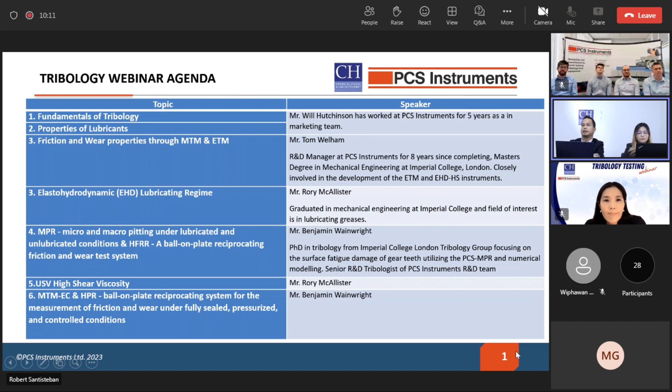Utilizing the PCS MPR in numerical modeling for 8 years. He is also the senior R&D tribologist of PCS Instrument and also in the R&D team. And then for the USV high shear viscosity will be again with Mr. Rory. And for the MTM EC and the HPR rig will be again with Mr. Benjamin Wainwright.

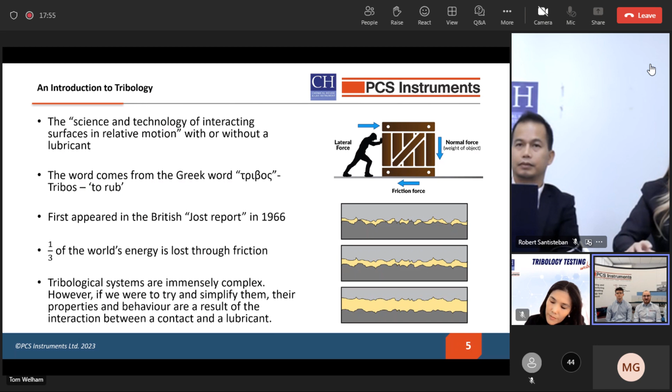Tribological systems are an immensely complex combination of different factors, but if we try to simplify a tribo system down to its most basic thing, their behavior is dictated by the interaction between a contact and a lubricant.

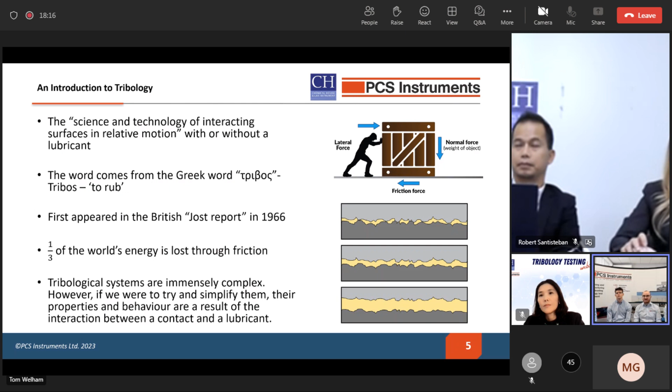So, tribological contacts. There are many important aspects to consider when analysing a tribological contact. First up, we have the materials. In most mechanical systems, the materials involved are steels. However, this isn't always the case, and not all steels are the same. Differences between materials can significantly impact a tribo system, changing the pressures experienced by components, the damage that parts experience, so things like wear and fatigue, how additives in the lubricants affect behavior, and the surface features of the components.

Not all contacts are steel. Different applications require different materials. For example, biocompatibility constraints are put on materials used in replacement body parts, like hip replacements.

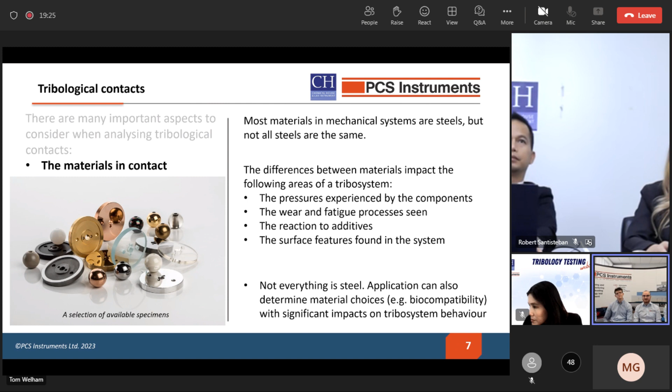Next we have the large-scale geometries of contacts, and whether those are conformal or not. To simplify, conformal contacts, like you can see in the image on the screen, are ones where the surfaces fit into each other. They have large contact areas, meaning they have lower contact pressures. This results in smaller elastic deformations, and some typical places this sort of contact is found is in journal bearings, piston bushes, things like that.

The non-conformal contacts, which you can also see on the screen, are the opposite of conformal ones. They have much smaller contact areas, meaning they have much higher contact pressures. This results in larger elastic deformations at the surface, and some typical places you can find these are in roller bearings, gears, and cams.

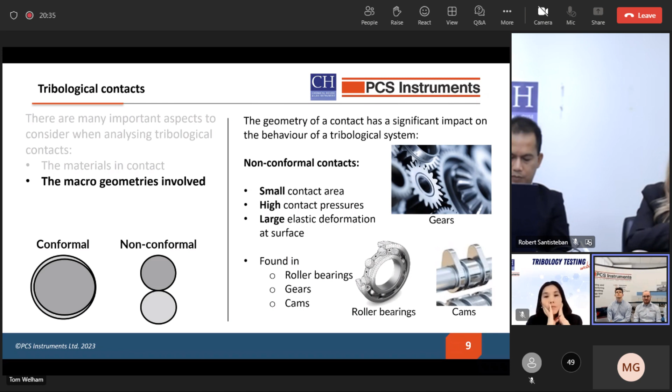Next we have the roughness of the surfaces that are in contact. Even if something feels smooth to the touch, at a microscopic level, the surfaces will still be made of peaks and troughs, like valleys and mountains. This roughness is a critical factor in the type and extent of damage a part will experience when in use. And as you can see from the examples on the screen, different roughnesses are deemed acceptable for different applications, as a balance has to be measured between cost and surface finish.

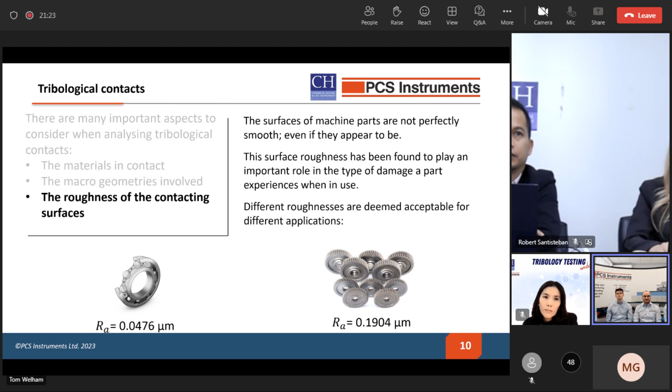Finally, just for this first bit, we have contact pressures. The contact pressures experienced in a tribo system will impact the amount of surface deformation seen on parts. The damage and failure mechanisms found in the system will also affect that. How the lubricants in the system behave, for example, are there additives activated when they're in the contact? The lifetime of the components, that's also very important.

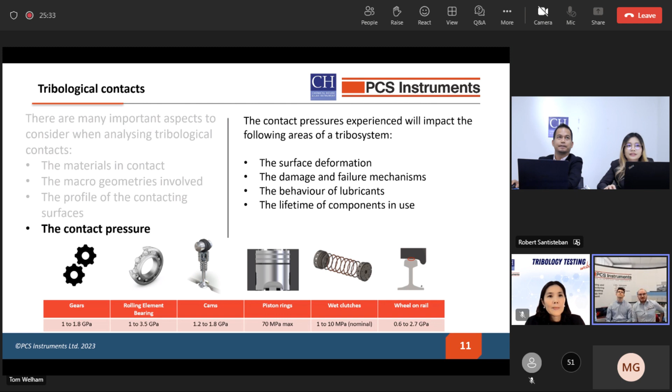So that was all sort of an introduction to tribology and contacts. So now we move on to the other key part of tribology, which is lubricants. When we talk about a lubricant, we mean anything that is within a tribo system which is there to reduce friction and to help parts move more easily.

The formulation of lubricants is very important. It's probably the most important thing. One oil wouldn't work for every application. Different formulations will have very different properties and behave very differently in tribo systems. Some of these properties that will differ are the viscosity of the lubricant, the degree of anti-wear protection it offers, whether it will form a surface film to protect against extreme pressures, and whether it will survive high shear events. Choosing and designing the right lubricant for the job can be the difference between efficient, long-lasting performance and premature failures in your tribo system and soaring costs.

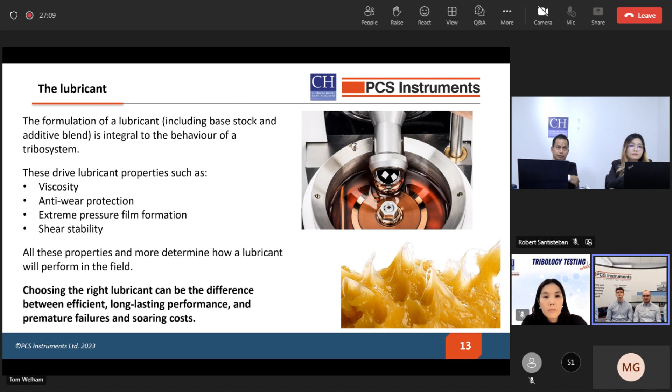We see this all the time across a wide range of applications.

So what does this all mean? Why is it important? These two main factors, the contact and the lubricant, will determine how your tribo system behaves. They will determine what lubrication regime is found. So are you seeing surface-surface interactions or a nicely lubricated contact?

They will impact the amount of friction found. So is your lubricant causing increased friction or is it reducing it and improving efficiency?

They will obviously also drive the thickness of your lubricant film in the contact. So are your surfaces separated, which prevents wear and reduces friction? Is your film too thick and reducing efficiency through churning losses?

And finally, what damage will occur in the system and when? So will your design experience premature failures such as fatigue, wear, pitting or scuffing in the field?

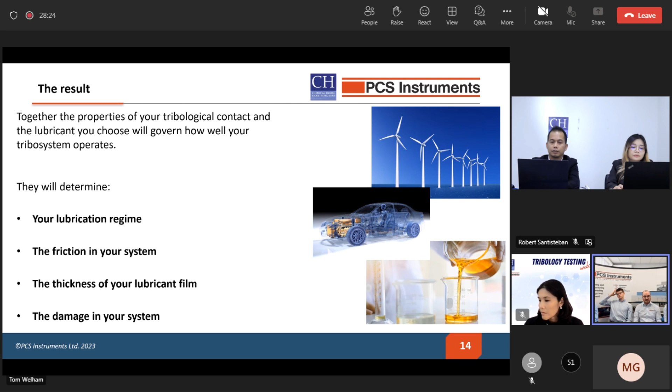If everything works well, if you've got the perfect lubricant for your tribo system, then you're in a great place. That normally means good lubricant films, low contact pressures, low temperatures.

However, in practice, in the real world, you'll very rarely see a perfect system because there are always competing considerations and constraints such as manufacturing costs, which means you can't get exactly what you need. Often you see some issues, things like surface-to-surface contact resulting in wear, or high stresses and pressures resulting in fatigue, or high temperatures resulting in scuffing.

This is where lab-based tribological studies come in, and our machines come in. They let you evaluate exactly how your system will perform in the field, and from this you can optimize your design, the design of both your machines and your lubricants.

Quickly, cheaply, reliably, all without having to resort to costly full system, large scale tests. You can also precisely balance those competing considerations to find the best solution for you.

So to summarize this intro portion of the presentation, tribology is critical in making sure moving surfaces do so in the most efficient and effective way possible. It allows you to understand the conditions the parts in your machine will experience when in use, evaluate how well they will work and how long they will last.

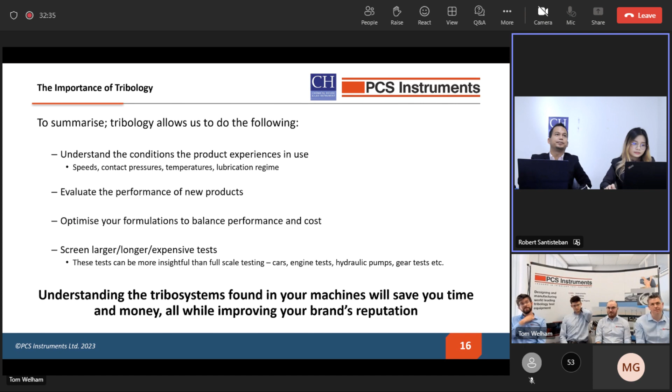Final page just for me before I hand off to my colleague Tom. So where do PCS Instruments come into the equation? We manufacture a wide range of laboratory test equipment to perform those benchtop tests I was just talking about.

All of our machines enable users to perform quick, easy to run, repeatable, reliable and accurate tests. They're also designed for versatility. So whether you want to run a standard test over and over to qualify an oil or do cutting edge bespoke tests designed with very specific applications in mind, our machines can meet your needs.

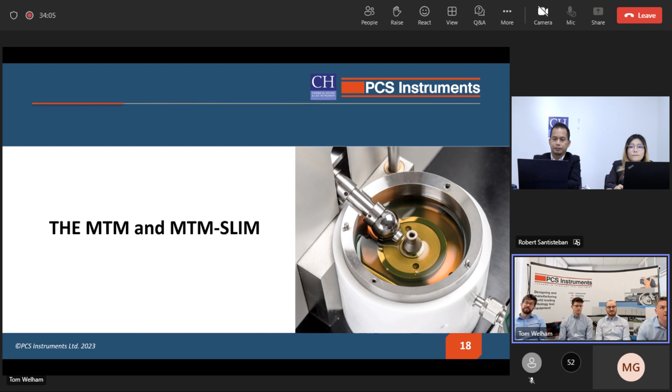Thank you. So I'm going to first talk about a general purpose tribometer, desktop tribometer called the MTM, and also the MTM Slim. So the MTM is a very flexible benchtop tribometer. It has a ball-on-disc geometry. So it's designed for looking at measuring frictional properties in a wide range of tribological contacts.

Many applications have been studied using the MTM, and we have a wide range of accessories to broaden its use even further. For example, we have the option of soft specimens and a lower load option to allow us to look at biotribological contacts.

And the MTM Slim option, which is an optical system that allows us to measure tribofilm growth. As well as things like a grease scoop and a grease applicator, which allows us to make repeatable measurements of grease performance.

We've got a huge number of materials and finishes of specimens, as well as different operating modes that we can measure friction under. And so I'll run through some of these accessories and some of the operating modes of the system now.

Firstly, the capabilities of the rig. As I said, it's a ball on disc geometry, and one of the key features is that both of these are independently driven. So we can control the speed of the ball and the speed of the disc independently. This allows us to set the amount of sliding and rolling in the contact, which gives us huge versatility in the conditions we can produce and the contacts we can look at.

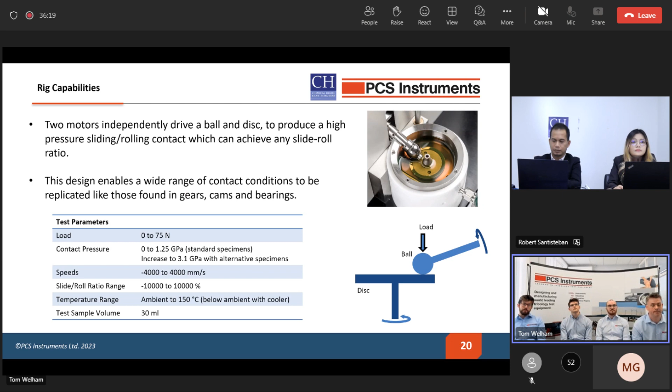So just some points about the relevance of the MTM to industry. It's used across lubricant and lubricant additive manufacturers to develop lubricants, and as we said, it's primarily used to measure the ability of a lubricant to control or reduce friction.

Also, as a screener test, it's small scale, and the cheap specimens compared to full scale testing mean it can be used as a very good screener for more expensive full scale testing. And it's been shown that the MTM can correlate to these much more expensive tests.

The SLIM system allows us to look at tribofilm formation and the growth of tribofilms, which helps with the discovery of new additives and the design of new formulations.

Also in standard testing, it's so easy to use. It's an automated system, so it's used widely to test every formulation, giving a quick and simple comparison of the frictional properties. So the testing can take the form of different step types.

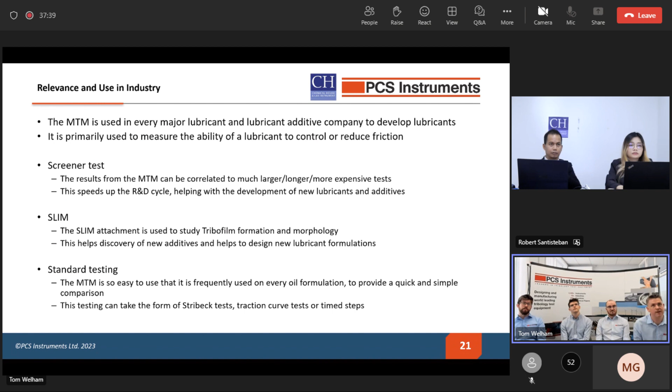We have Stribeck, traction tests, and time steps. I'll go through these individually to explain how each one works.

A Stribeck step is where we look at how entrainment speed affects traction or friction for a fixed slide roll ratio. So we change the speed and keep the slide roll ratio constant.

A traction step is where we fix the entrainment speed and then see how the slide roll ratio affects traction. Finally, a time step is where we look at the evolution of the traction coefficient over time, while we either ramp or keep the speed and slide roll ratio constant.

In more detail about the Stribeck curves — they're really useful because by varying the entrainment speed, we can look at how the lubricant behaves in different lubrication regimes. So at high speed, around here, we're in the full EHD region, where the oil itself is supporting the contact. There's no metal to metal contact, so it's the base oil properties that control the amount of friction in the contact.

As we move down through the speed range, we come into the mixed regime, where we're starting to have some interaction between asperities in the contact. Right down at very low speeds, we're getting towards the boundary regime, where there's significant asperity contact, and the load is being supported a lot by actual metal to metal contact. When we can test down in this region, we can look at how tribofilms form to protect the surfaces in these regimes.

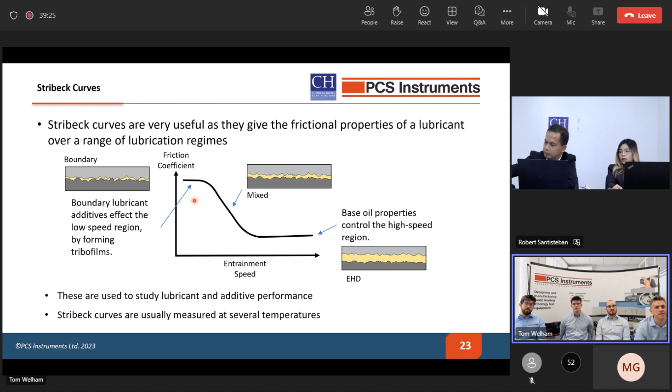So traction curves are also very useful. We usually use the term traction to describe the use of frictional forces to transmit mechanical energy. As mentioned, in this type of step we fix the entrainment speed and then vary the proportion of sliding to see how traction is impacted.

There are many benefits to looking at this, one of which is to look at the limiting shear stress of the lubricant. It's particularly useful in CVTs as well, where we're using the lubricant with the aim of transferring a mechanical force using the contact.

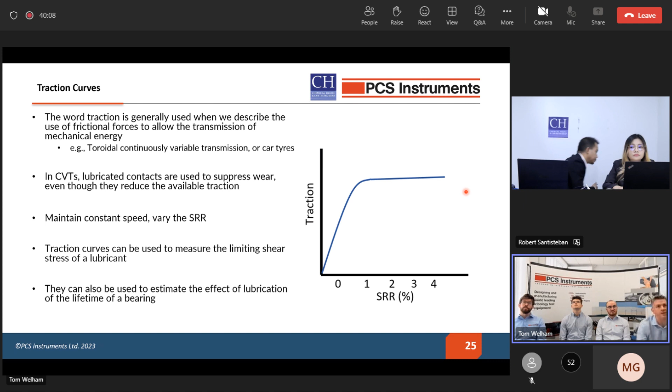So finally, the time step. This allows us to vary the speed and slide roll ratio over a fixed period of time. It can be used independently, but often it's used in conjunction with other steps to allow for the development of tribo films and running in of surfaces.

We might want to impose a consistent level of sliding when comparing multiple lubricants, for example at an elevated temperature. When we run our tests, and this is common to all our instruments, we have a profile editor that allows us to customize each step the machine will run, the durations, the conditions, which gives amazing flexibility to the range of tests the machine can run.

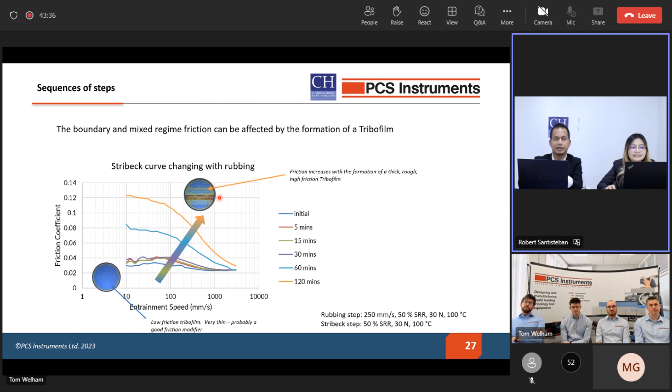We're going to look now at a few applications of the MTM, not just in the standard steps, but some of the alternate accessories that can be used with the instrument.

Firstly, an interesting application is to test seal material. Seal testing is traditionally split into two categories: simple wear testing, such as using a pin on disc, or testing the complete seal in place. The first method, a pin on disc, often bears very little relevance to the actual final application. The second is generally a very expensive test and is actually quite unsuitable for developing new materials.

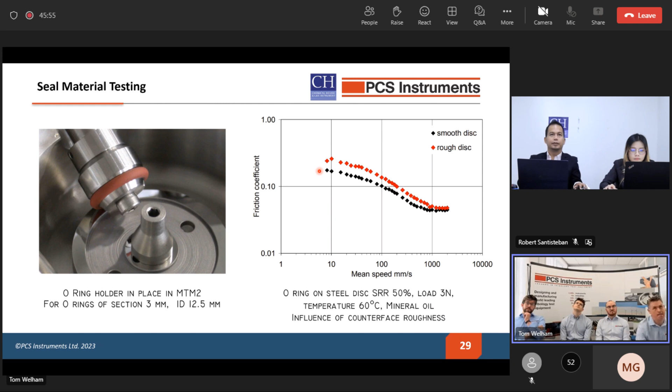Biotribology is another interesting application for the MTM. It's an expanding field of research. The MTM has an excellent track record of giving very useful, repeatable friction measurements in soft contacts, a bit like we've just shown.

We can use a variety of materials for biotribological studies, but the use of PDMS for either one or both of the surfaces is very common in the literature. So we can adapt the MTM using the low load beam, bringing us to a load range of 2 to 8 newtons, and use it to look at artificial joints, mouthfeel, cosmetics, amongst many other biological contacts you can think of.

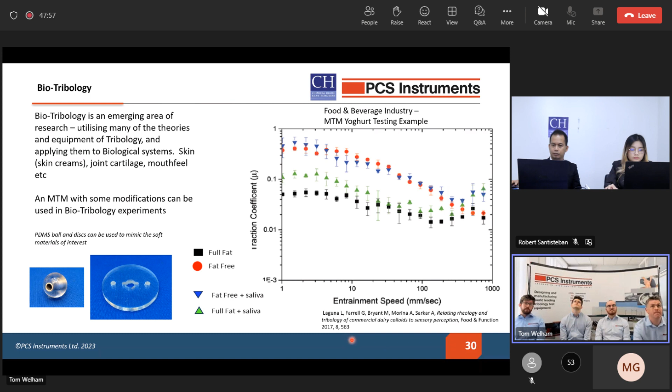One final application, away from biotribology now, is some work that was done on wheel-rail friction using the MTM and the grease scoop and applicator accessories. In the rail industry, top of rail products and flange products are used to control the friction between the rail and the wheel.

With the top of rail product, we're looking at reducing the amount of friction over just the dry contact, but we don't want to just use a grease. We want significantly more friction than that to allow us to accelerate and keep on the track nicely. So the MTM was used as a study in this.

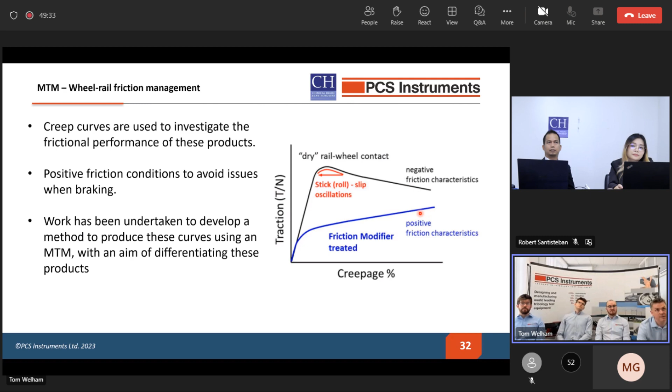So the use of friction modifiers in these top of rail products allows us to have what we call positive friction characteristics. As sliding increases, the traction coefficient increases, giving this behaviour which means we never get into this unstable oscillation.

There was a study into this using the MTM, and it was found to very well be able to differentiate between these different top-of-rail products. It ended up being cited in EN 15427 as an indicative test. So now there are qualifications on the level of traction we see in the MTM to allow these products to be used.

I think I'm pausing here.

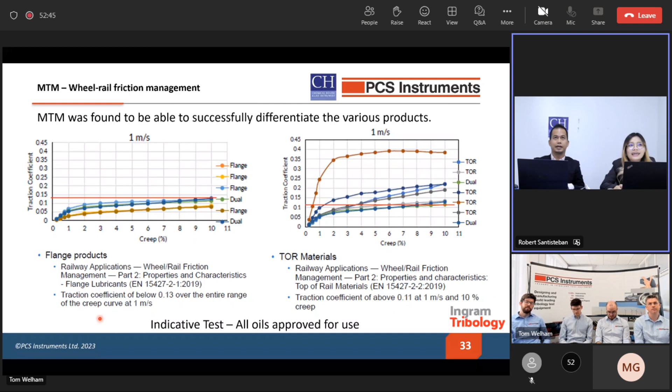Thank you. So now I'm going to talk about one of the MTM's most widely used accessories, the SLIM system, also known as the 3D Mapper. It's an optical interferometer which allows the thickness of tribofilms to be measured while the specimen is mounted inside the MTM. It has many uses, and I'll explain a few of these now.

The system works by bouncing a white light off a semi-reflective disc. Part of the light is reflected directly back, and part of it goes through the contact, reflects off the steel ball, and when the light recombines, we have constructive interference at different frequencies depending on the thickness of the anti-wear film formed on the surface.

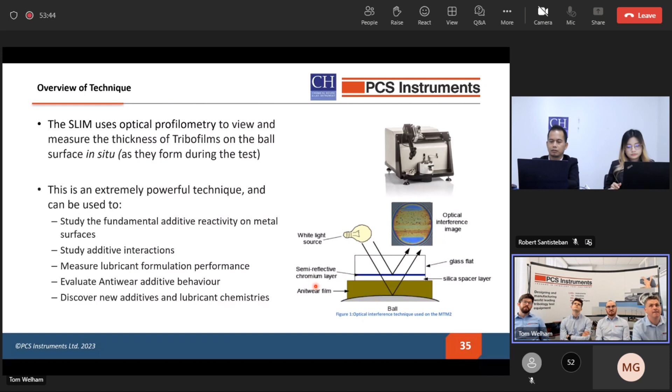So the way it works in the MTM, when running a test, the ball is rubbed against the metal disc, using a time step that allows us to build up the tribofilm. Then we backload the ball against the glass window that sits above the lid of the MTM, with the ball stationary. We then take a picture using an attached camera, and that allows us to translate the image into a measure of film thickness, or tribofilm thickness.

So this is a typical use case showing how tribofilms evolve in different oils. We took a series of timed steps represented by sliding distance. We set a speed and duration, and from that we could work out the distance we wanted. This compares 4 different oils, and on the y-axis we have film thickness in nanometers.

It shows how varied tribofilm formation can be between different chemistries. We have some fluids that form very little or no film, and then we can see how some take slightly longer to start building up film thickness, and others that form earlier and are actually slightly unstable, so there's a bit that's worn away as the test progresses.

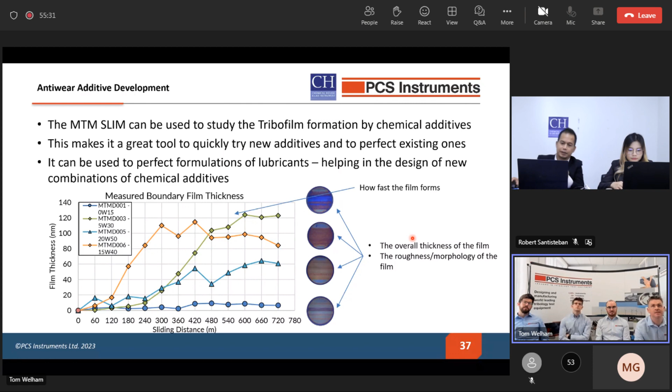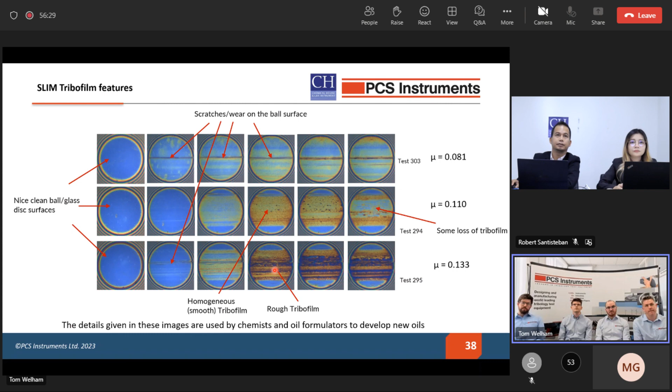So just finally, about the MTM - why is it so useful? I hope I've demonstrated that the Slim can be very useful in developing new anti-wear and other boundary film additives, as well as being useful in perfecting formulations that develop a stable tribofilm, helping to control friction and wear.

With the Slim, the MTM can also be used as a screener for new additives and formulations, which can save significant costs compared to large-scale testing. And finally, with increasing restrictions on traditional anti-wear additives such as ZDDP, the MTM SLIM is a great tool to look at and compare entirely new additive technologies.

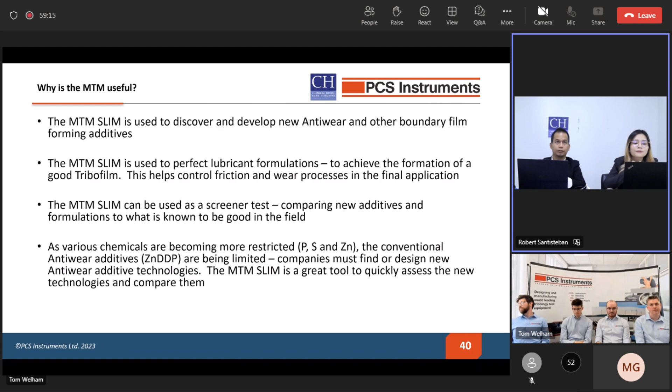So next, closely related to the MTM is another instrument called the ETM. The ETM is very similar in terms of geometry, ball on disc, specimens of the same size. The main difference is that we can now go up to loads of 1650 newtons.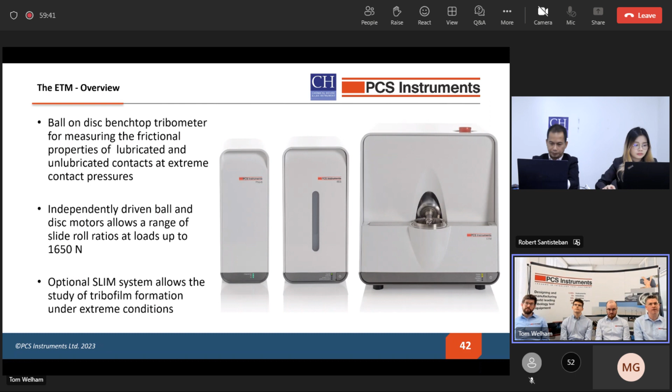It also has the slim option to look at tribofilm growth, but now under more extreme contact pressures. Here are some specifications for the ETM, comparing the contact pressures we're able to achieve - up to 3.5 gigapascals with the same geometry specimens as the MTM. This shows the contact pressure range we're able to test under. Otherwise, the spec is very similar.

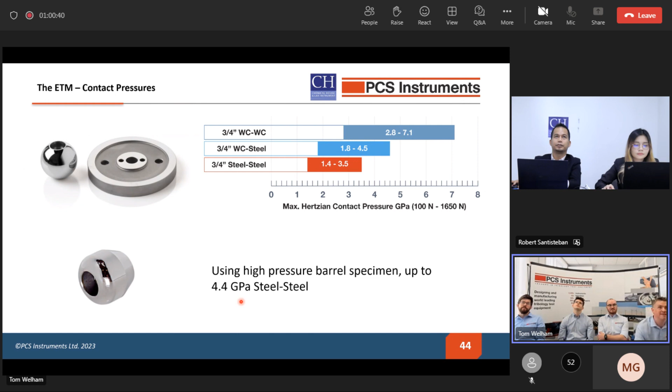A little bit more about contact pressures with the standard specimens - as I say, up to 3.5 gigapascals. But we can actually use tungsten carbide specimens if we want to go even higher - contact pressures as much as 7.1 gigapascals, extremely high. Or if we want to stick with steel, we can change the geometry of the ball to give a sharper radius, which increases contact pressure, taking us up to 4.4 gigapascals, still with a steel contact.

The high contact pressures possible on the ETM allow us to mimic the conditions seen in very highly loaded gears and bearings, which helps with the development of new lubricants, coatings, and materials.

I'm going to mention a few applications today, such as the ability to generate high load traction curves to investigate mechano-tribofilm formation, and also to evaluate the scuffing resistance of lubricants under these very high contact pressures.

Traction curves are made in the same way on the ETM as the MTM. The graphs here on the left show 4 traction curves at different contact pressures from 1 to 4 gigapascals. This is from a paper published here in Tribology Letters.

We can see the initial slope of the curves increases significantly as we increase contact pressure, and we also arrive at a much higher traction coefficient at significantly lower slide roll ratios, as we'd expect.

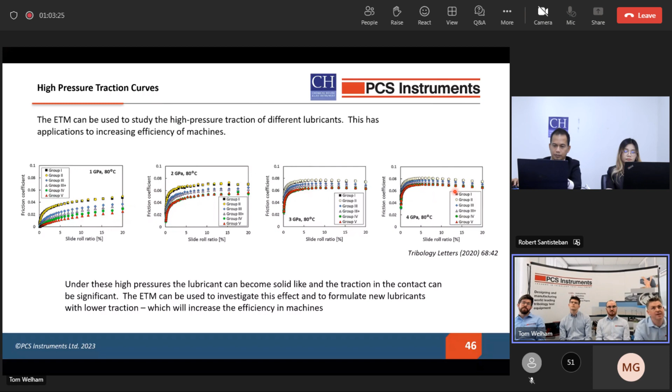From a mechanochemistry side, this was a paper published in 2020. Very quickly, it shows how previously it was thought that the development of ZDDP films required metal-to-metal contact, but actually using the ETM in this paper it was shown that rather than being hydrostatic pressure that's responsible for tribofilm growth, it's actually shear stress dependent. So we can have a full film, but if the shear stress is high enough, we can still develop ZDDP films.

We see this shown here: these top 2 have much higher friction coefficients, and using the ETM SLIM we see the development of tribofilms, whereas here, where the friction is significantly lower, under otherwise identical conditions, we see much less of a tribofilm.

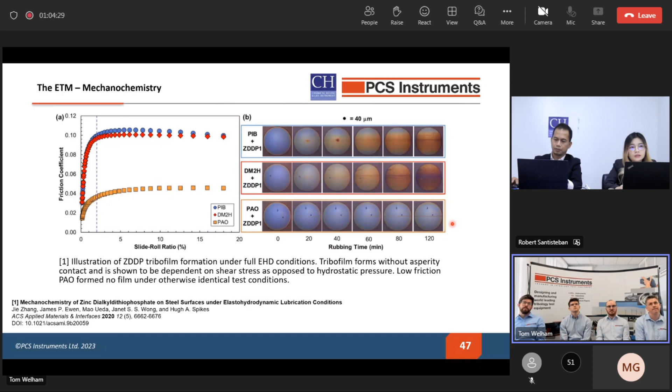So again, why is the ETM useful? It's used to study the effects of high contact pressures on the performance of lubricants, which are relevant to some advanced gear and bearing applications. We have seen that chemical additives can behave very differently in the contact, which is not yet fully understood, so the ETM can be used to help study these.

And as a screener for example, the FZG scuffing test - with ETM specimens the test is much quicker, the specimens are much cheaper, and so it's a great way to screen lubricants for that test. As it says here, it's a unique instrument with no alternative. So I'm going to hand back to the translation.

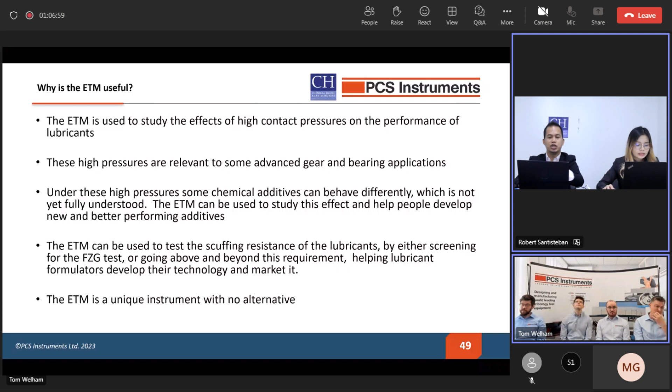Okay, thank you for that. So I think we will be moving to the new topic, which is the elasto-hydrodynamic lubricating regime. So moving from traction or friction measurement by the MTM, let's continue the presentation to the topic to measure the thin film that is formed during the EHD.

So using this EHD rig, may I call now Mr. Rory to proceed with this presentation. Yeah, thank you, Robert. Yes, that's right. I'll be talking about the EHD rig, which is PCS's instrument for measuring the thickness of lubricant films.

This machine allows accurate measurement of film thickness under conditions close to those of real machinery. It's applicable to base oils, new lubricant formulations, as well as polymer additives like viscosity modifiers. It's also commonly used in research, analyzing the fundamental aspects of EHD lubrication.

So what it's actually doing is, as shown in this diagram here, we're using a microscope to look through a glass disc at the contact between the steel ball and the glass disc as they roll together.

Now running through the capabilities of the EHD rig quickly. It can measure lubricant films up to 1,000 nanometers or 1 micron, and that can be under contact pressures ranging from roughly 0.2 to 2 gigapascals, depending on the contact conditions, at entrainment speeds of up to 4 meters per second.

And like the MTM, an advantage of this machine is that the sample volume required is actually quite small. In this case, 120 milliliters.

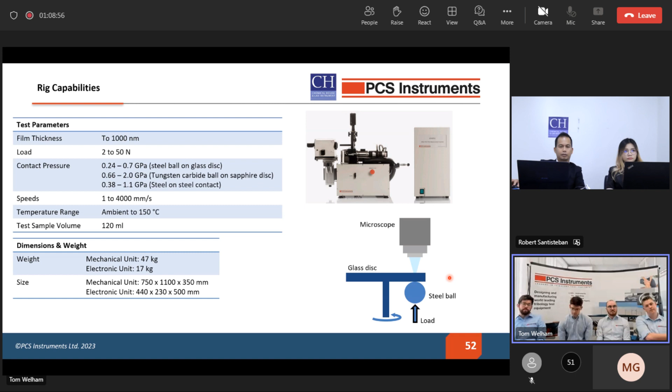So there are 3 fundamental techniques that the machine is capable of performing. There's film thickness measurement, which is fundamentally very similar to the process that Tom described earlier, except in this case we're taking a very accurate measurement, accurate to theoretically 1 nanometer or so, across the center of the contact.

It's also capable of contact mapping with the SLIM method, which is exactly like what Tom described. The difference here is that we're looking at the rolling contact, and we're measuring the actual thickness of the lubricant film separating the surfaces.

It can also separately perform traction testing, and the advantage here is that you can measure film thickness and then traction under very, very similar test conditions.

So the rig mimics the contact conditions of applications like bearings and gears, allowing evaluation of oil formulations and important mechanisms like lubricant starvation. And that gives very useful information to lubricant engineers relating to real applications.

And actually, film thickness is specified in some lubricant specifications. For example, the Dexron 6 specification by General Motors for automatic transmission fluids actually specifies the minimum film thickness allowable under certain conditions.

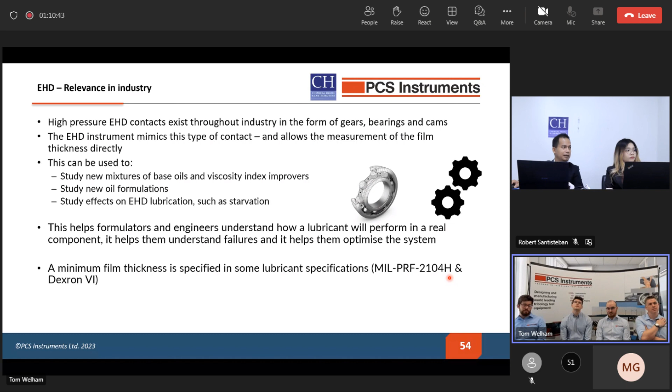So two applications that I'll mention here are bearings, in which the contact conditions like speed, temperature, and other conditions can be replicated, and so a film thickness estimate can be achieved using the EHD. That would indicate whether the lubricant viscosity is sufficient for your bearing application.

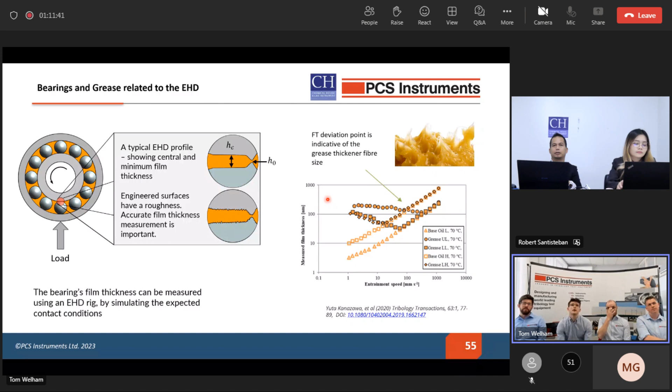An important ability of the EHD rig is to evaluate the pressure viscosity coefficient of a lubricant. So viscosity increases exponentially with pressure. In this case, for an oil at 20 degrees Celsius, the viscosity increases more than 1 million times when going from atmospheric pressure to approximately the pressures of a tribological contact.

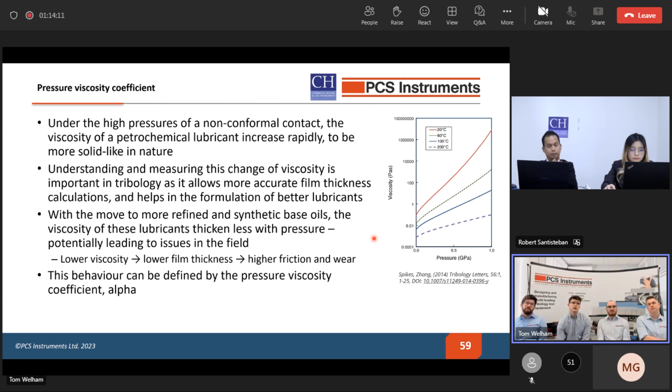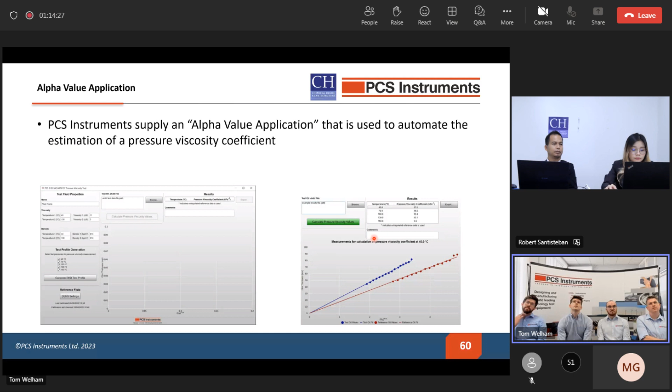Using PCS's alpha value application, the film thickness results from a test can be fitted to a model for film thickness, providing a simple method to obtain a lubricant's pressure viscosity coefficient.

So to summarize the EHD rig's capabilities, it can measure the film thickness of lubricants under EHD conditions, either with the extremely accurate interferometry technique or the SLIM contact mapping.

That can allow optimization of lubricant viscosity, allowing maximum efficiency while still protecting surfaces from wear. The EHD is commonly used to evaluate film thickness behavior of new lubricant formulations, base oil mixtures, and viscosity modifiers, as well as being able to evaluate the pressure viscosity coefficient of lubricants.

It's also used in research, analyzing the fundamental mechanisms of EHD lubrication. And I think at this point, I'll pause for translation.

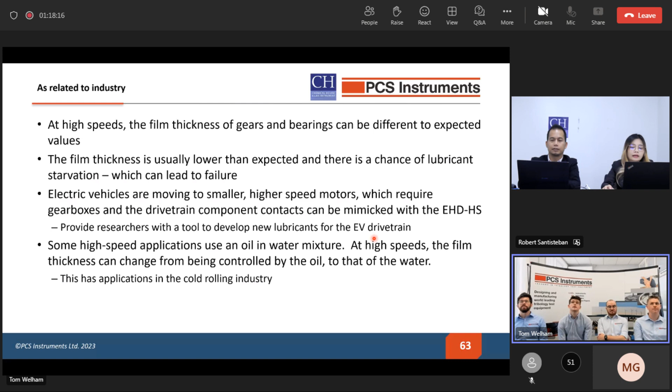Another example where high-speed behavior is different to lower speeds is that of emulsion lubrications. This is another example where the high-speed EHD can help you understand more about that application. In that specific case, the effective viscosity of emulsions can greatly reduce under high speed conditions, close to that of water.

It was shown in this work that this behavior was caused by a combination of inlet shear heating, which reduces viscosity, and inlet starvation, which I showed earlier can greatly reduce film thickness. It's difficult to predict these effects without actually measuring them.

The EHD HS is very useful for directly measuring how these effects occur. The researchers found that shear heating effects varied significantly depending on the type of base oil, and therefore different correction factors were required for the different oils, which had to be based on experimental results.

So it's difficult to model this type of behavior, but the EHD-HS allows measurement and assessment of the behavior of different oils under these effects.

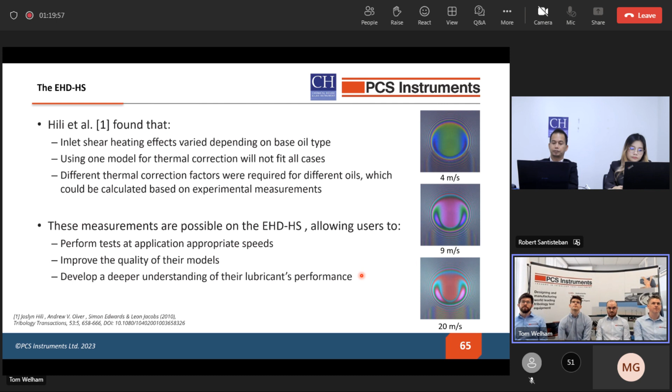Much like the standard EHD, the EHD-HS can deliver a wide range of contact conditions in terms of temperature and contact pressure. But while the standard EHD can go up to a maximum entrainment speed of 4 meters per second, the EHD-HS can reach 20 meters per second.

That makes it applicable to applications such as electric vehicle drivetrains, additive formulation in automotive lubricants, metalworking fluids and emulsions, high-speed turbine oils, as well as greases, which are particularly vulnerable to inlet starvation.

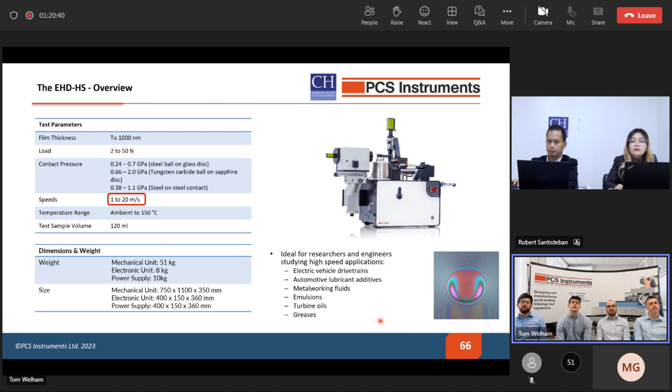So to summarize this quick introduction to the EHD-HS, this machine is the high-speed upgrade to the standard EHD and is similar in capabilities except that it can reach up to 20 meters per second rolling speed. This makes it suitable for the film thickness measurement of lubricants for high-speed applications like electric vehicles, which are trending to smaller and faster conditions, as well as a range of other options.

In addition to the ones I've already mentioned, things like motorsport, elevators in tall buildings which travel extremely fast, machine tool spindles, and aviation gearboxes. Finally, it's useful in the research of fundamental effects like inlet starvation and shear heating, which can have significant impact at high speed.

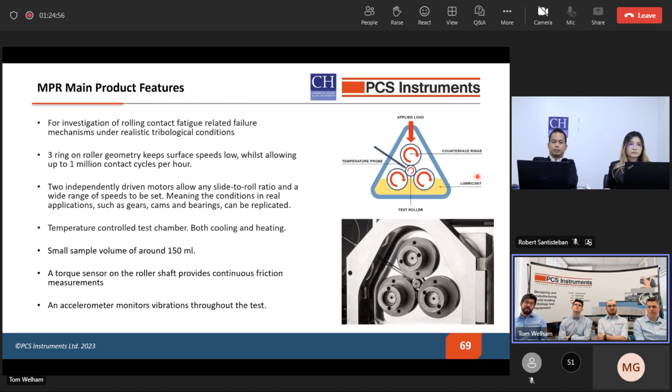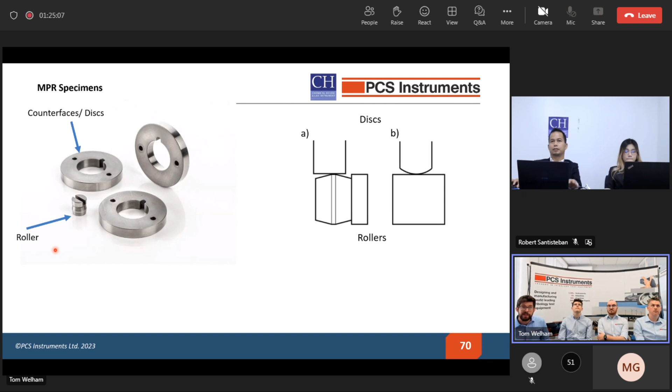So I'll talk a little about the specimens that we use on the MPR. As I said earlier, we have 3 counterface discs, and these run against the central roller, and the central roller is what generates the damage. The roller can come in multiple geometries. So we can have a chamfered roller, which gives us a line contact. In a chamfered roller setup, we have a flat disc. This is applicable for gearing, where we predominantly see line contacts, and it's very good for generating micro-pitting damage or wear, because as the roller profile is reduced due to material loss, the pressure does not reduce as significantly.

However, other contacts are used as well. So we also have crown discs, where we have a radius on the disc surface, and this gives us an elliptical contact when run against a flat roller. This is more applicable for bearing contacts, and we can generate much higher pressures. We can actually vary the crown radius to extremely small radii to generate high pressures such as 4 to 4.4 gigapascals, whereas the line contact will probably end up generating more like 2.5 to 3.

So I'll talk a little bit about what is fatigue and why it's important in tribology systems and why we need to test for it. Fatigue is damage that accumulates due to cyclic loading. This is often at much lower stress levels than the material's ultimate or even yield strength, and it's measured in number of cycles. This is, in time to failure, often measured in millions of contact cycles. A contact cycle is a single event, for example, 1 rotation of a gear tooth or 1 rolling element across a raceway of a bearing.

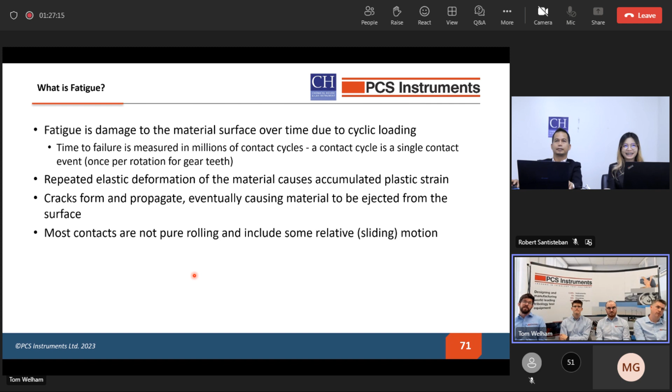So there are quite a few types of fatigue. In particular, I'm going to focus on rolling contact fatigue, which is what the MPR tests. This is obviously most commonly observed in rolling contacts such as element bearings, gears, and cams, and they're all non-conformal in nature, so they are generated under high contact pressures.

Rolling contact fatigue is made especially difficult to study because it has a large number of influencing factors, such as material geometry, the geometry of the contacting bodies, pressure, the lubricant, the roughness, and of course sliding in the contact as well, which applies a shear force that pulls the surfaces apart and creates the cracks and pits that we see in bearings and gears.

The two main types of pitting and fatigue damage we see in these contacts are macro pitting and micro pitting. Macro pitting occurs on quite a large scale, so we can see with our naked eye these large pits that form on the surface, and these are often detrimental to the application, often calling for the end of life of these components to be replaced.

Micropitting, on the other hand, happens on a much smaller scale, often on the same scale as the asperities - the peaks of the surface roughness that are in contact, measured in about tens of microns. These can form a dense network of pits and cracks and create a continuous removal of material, and the micropitted surface can end up looking quite dull and matte in appearance.

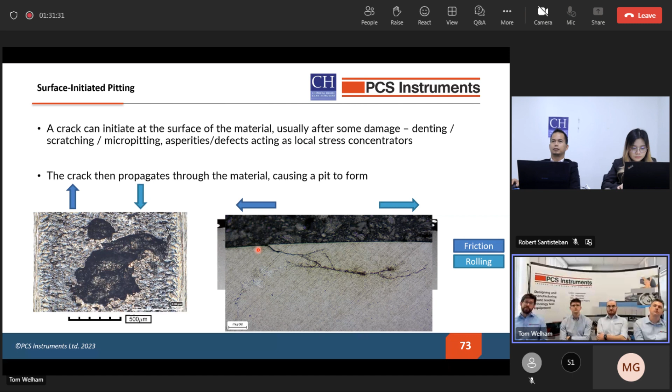Here's some examples of surface-initiated pitting. We often see a distinctive shape, this fan shape. The point of the fan, located here, often indicates the origin of the crack, and you'll see beach marks close to the origin where we have these striations from stop-start propagation, and then towards the end of the pit it'll be a torn surface where it propagated very quickly and the material was removed.

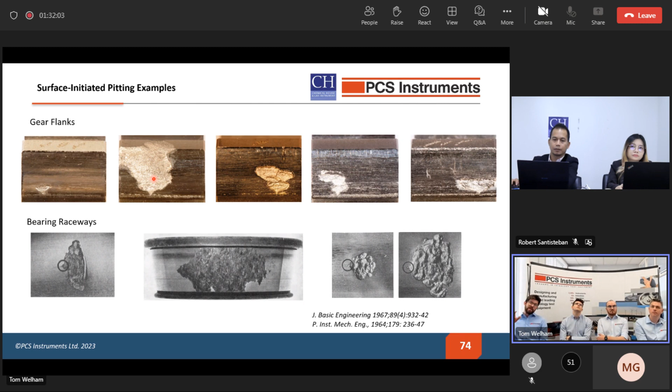So in an MPR, we can run a lot of these pitting tests, and the MPR is very good at running pitting tests because you can generate a lot of cycles in a short period of time. Because of the accelerometer addition on the MPR, we can monitor vibrations throughout the test.

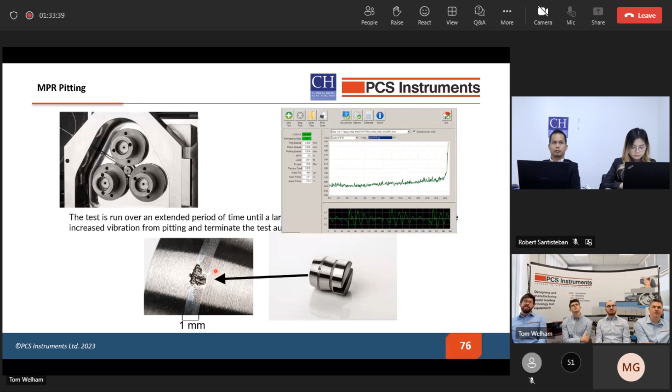And when the test is over, we can form this pit, take it out and analyze it. We can cut the specimen up, take pictures, and analyze the profile of the roller after the test. Here's an example of an accelerometer trace throughout the test.

You can see that for much of the test, the vibrations are really low, because what we're seeing is just a crack slowly propagating. But as soon as that pit is formed, you get a very large spike of vibration. What's fantastic about the MPR is you can stop the test as soon as that pit occurs, so no more damage is accumulated after that, which makes it much simpler to analyze the pits formed from your pitting test.

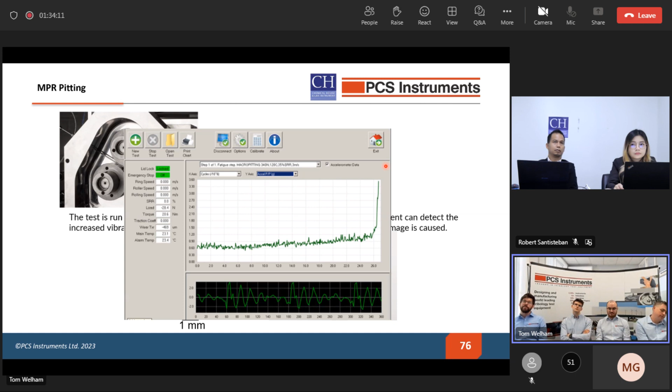Next, we'll talk about micropitting. Micropitting is more of a concern in rougher contacts and thinner films, where you have a lot of roughness in contact, which creates very high stresses very close to the surface. It occurs in these non-conformal rolling sliding contacts, quite often in gears which have a rougher surface than bearings.

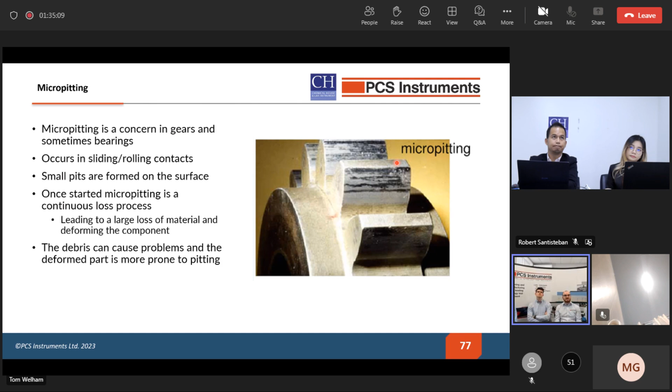This can be akin to something like wear, but micropitting is a fatigue-driven process, unlike wear. The debris can cause problems as well, as it can get inside the contact and actually accelerate the damage as the micropitting is formed.

So the mechanism behind micropitting: it's surface fatigue. It happens very close to the surface, and it's fatigue on the asperity level, caused by the surface roughness. This is most common in the boundary or mixed lubrication regime.

The surface roughness in contact forms very high stresses very close to the surface, and the cracks propagate in the opposite direction to friction. Many cracks are formed, and these cracks interact with each other in a very complicated way, which is very hard to model. Small bits of material are ejected continuously as the process goes.

So we end up with a lot of material loss due to micropitting. Here is a surface generated on an MPR specimen, with many cracks and pits being formed continuously. You basically regenerate the surface over and over again, and if you can maintain the same test conditions as the MPR can do, you can generate a lot of damage very quickly.

Here we have a few more examples of MPR testing. Another great thing about the MPR is you can stop the test, pause it, and take the roller specimen out. You can measure the level of micropitting by looking at the profile, measuring the track width, and see how the profile width increases throughout the test, giving a measure of the level of micropitting throughout the test.

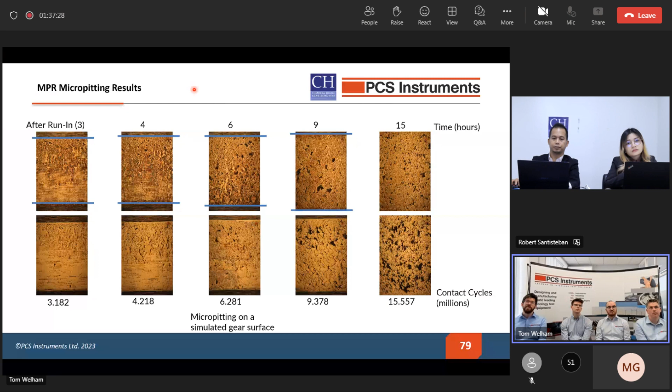So why is the MPR useful? What industry are we interested in looking at fatigue? Well, to be honest, all industries should be very interested in looking at fatigue and wear testing. Heavy industry in particular, and transport, the energy, metallurgy. For example, in metallurgy we're very interested in the crystal structure of steels and how that is fatigue resistant. There's a lot of parameters to change there, and if you're testing steels, you want to test them quickly to get a lot of feedback.

The energy sector, so wind turbines, they're seeing a lot of fatigue failures at the moment, premature failures. It's very important that they test their machine element components. The same for transport. Lubrication, so oil formulations, we want to look at how their formulations protect against fatigue and wear. It's crucial that they do fatigue testing on those too. So the MPR is all about improving the safety of machines and increasing the reliability, and therefore the cost, of machine element replacement.

In summary, the MPR is an accelerated rolling contact fatigue tester. It can reduce the time it takes for pitting and micropitting tests compared to other standard tests out there. It can be used for a wide variety of applications to develop new materials, looking at coatings and lubricants. It can mimic the parameters found in gearboxes and bearings, machine elements for a wide range of applications. And because of its three contact geometry, we can look at the real design lives for these applications in a very manageable, short space of time.

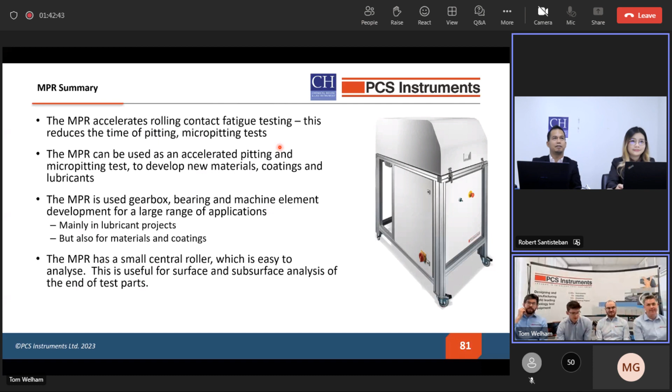So the HFRR, like Robert said, most of you will probably be very familiar with this instrument. This is one of the first instruments developed by PCS. It's the high-frequency reciprocating rig, and it consists of a ball specimen, which is the upper specimen, and a disc. This ball is loaded against the disc and vibrated at a high frequency back and forth in a lubricant bath, and this simulates the performance of both fuels and lubricants under boundary conditions.

The pot which holds the disc is heated and the temperature is monitored at all times, and we get a continuous friction measurement throughout the test.

Here are some of the parameters of the HFRR. We can test up to loads of 10 newtons, which gives us a contact pressure of maybe 1.4 gigapascals. The frequencies are about 10 to 200 hertz, and stroke lengths of 20 microns to 2 millimeters. With the addition of the high-powered heater option, we can go up to 400 degrees.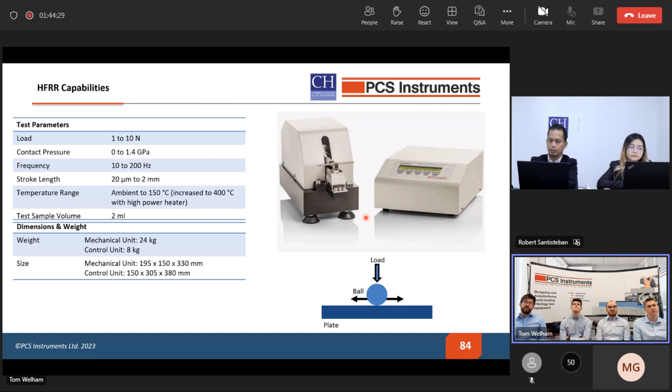A benefit of the HFRR is the very small amount of lubricant volume required. So it's a really good screening test for niche applications where you're not creating a huge volume of lubricant at once. And it's the only instrument specified on the diesel fuel lubricity test methods, that's ISO 12156 or ASTM D6079. When you have an HFR, these standards are preloaded onto it, so it's very easy to test with them. But it's not just on the standards, it could be used for lots of applications too.

The HFR is a really good screening test for lubricants because we can look at the measure of friction and wear very, very quickly, and it's very easy to compare the performance of lubricants because of this.

An example of the kind of application which the HFR is very good at looking at is piston friction in lubricant development, so sliding up and down of pistons. It can evaluate the coatings, materials, the lubricant formulation. There's a lot of parameters that can be changed for an HFR test. It can also look into failure modes such as fretting or false brinelling, which is when we get vibrations in machine elements such as bearings and gears, and this can cause premature failures. So it's very useful to look at stuff like that too.

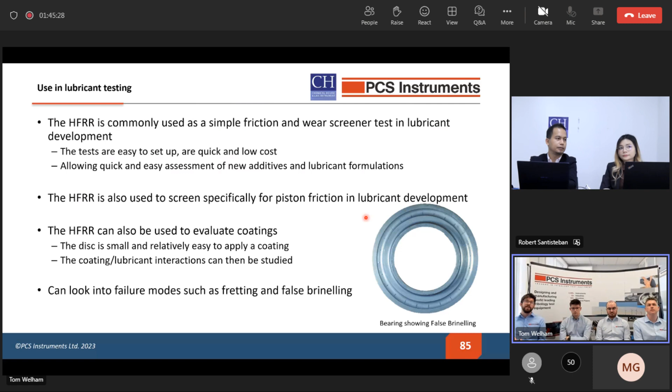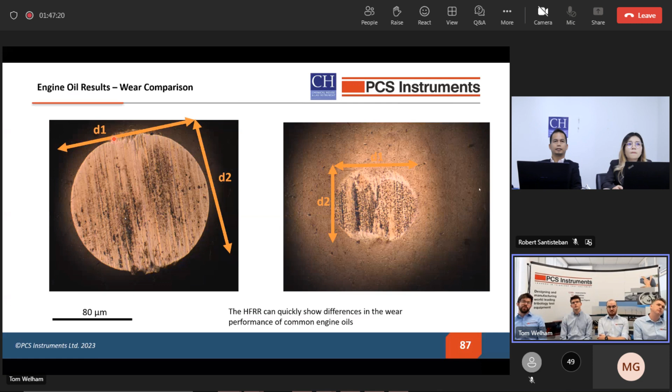In summary, the HFR is a standard for diesel lubricity, but it's also a great screening test for lubricant properties, for materials, for coatings. It's very quick and easy to use, requires a very small amount of lubricant to set the test up, and can be optimized to look at piston contacts, but also other failure modes such as fretting and false brinelling, which is found in gears and bearings. It takes minimal lab space and is one of the easiest instruments really you can use for this kind of application. Thank you all.

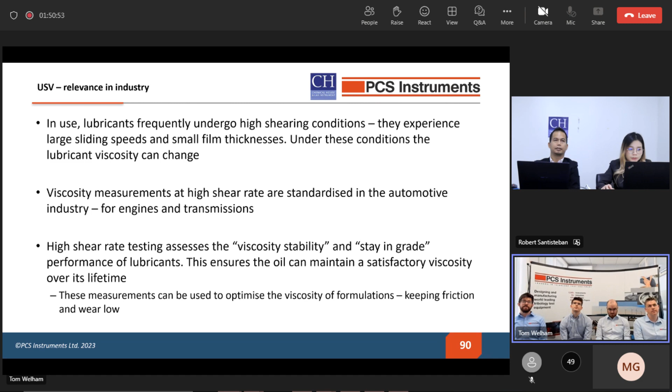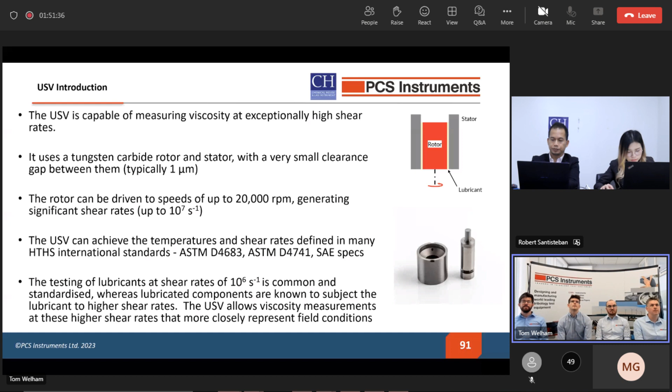The benefit of the USV is that we can test under much more realistic conditions of shear rate and temperature. So we can test at a shear rate of up to 10 to the 7 per second, which is actually higher than the shear rate specified in many of these high temperature, high shear standards. The maximum test temperature is 150 degrees.

It's quite a small machine that can sit neatly on the benchtop, and it requires a very small sample of fluid, just 5 milliliters.

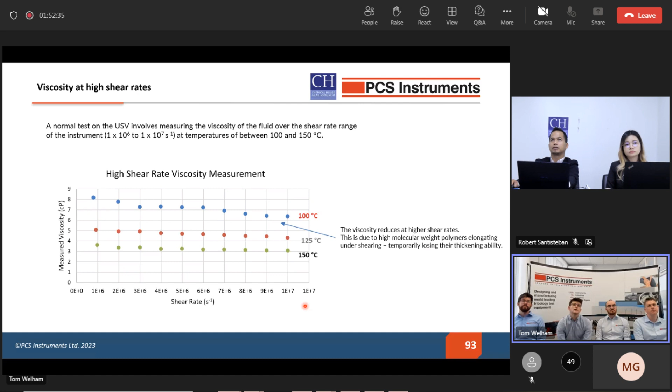Looking now at the case of a crankshaft journal bearing, we can illustrate some of the effects of shear thinning. Typically the metal surfaces are separated by a thin oil film, but at high speeds this shear thinning effect can occur, which potentially can improve efficiency via a drop in viscosity. So you're wasting less energy shearing the viscous fluid, but if the viscosity drops too low, metal to metal contact can occur, and that can cause wear and energy losses. So there's actually an optimum level of shear thinning.

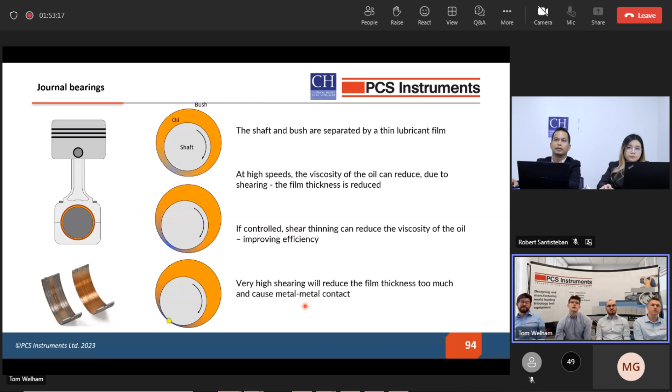Another important effect that can be characterized with a USV is a permanent loss of viscosity. With this effect, long fluid molecules are permanently split by the high shear rate, resulting in a drop of viscosity that does not recover. This can be analyzed with the USV.

Clearly it's very important to understand if the loss of viscosity due to shear will happen to a lubricant in its rated lifetime, and there are many standardized tests to evaluate this. But the USV provides a very cheap alternative, and it can actually achieve higher shear rates than many of these tests.

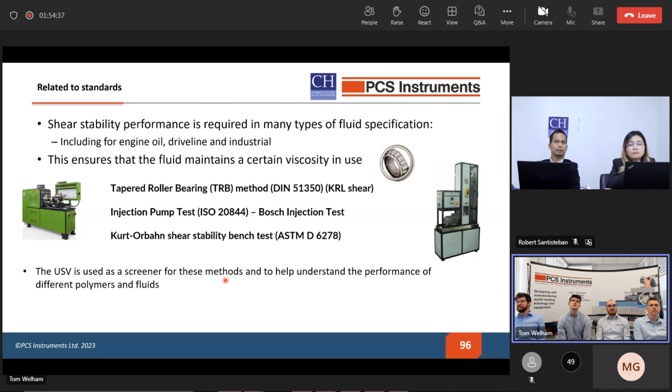Just to summarize then, the USV is an accurate and adaptable high shear rate viscometer. It can be used to measure viscosity under realistic shear rates, meeting many standard conditions, and it can actually go to higher shear rates than the standards. This will allow you to optimize the shear thinning effect of your lubricant, as well as being able to characterize the permanent loss of viscosity that a lubricant might experience.

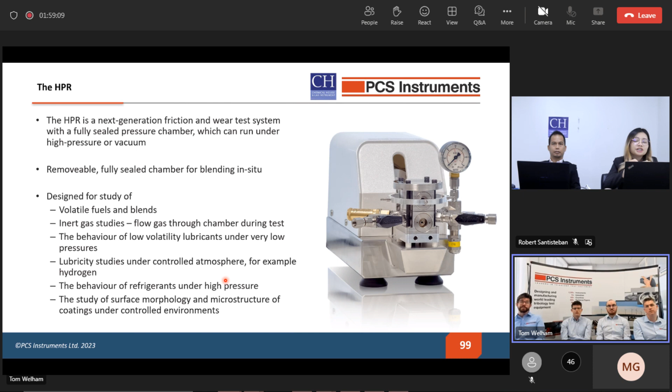The second rig I want to talk about is the MTM-EC. This is a modification to the MTM and could be bought as an entire unit or as an upgrade for existing MTM systems. It consists of electrical potential across the contact, controlled using the PCS software. You can apply both DC and AC voltage up to plus or minus 60 volts, and currents from 0 to 2 amps.

Both voltage and current throughout the entire test are measured in situ, so we get an average voltage measurement of the contact throughout a timed Stribeck or traction step. In addition, we have an oscilloscope connected to the MTM, integrated into the PCS software, so we can capture very high sample rates and see discharge events as they occur in real time.

We have automatic power switching for automatic testing, so it's very easy to set up and use for customers. It comes with updated casings and electrical resistance switch boxes to allow a wide variety of current, voltages and powers to be tested across the contact. This is important for testing in EVs, where we see parasitic currents forming across contacts. Electric motors, wind turbines, and generators also see this kind of damage and friction change because of electric potential across contact. It's very topical at the moment, and PCS has developed the MTM-EC in response to customer requests.